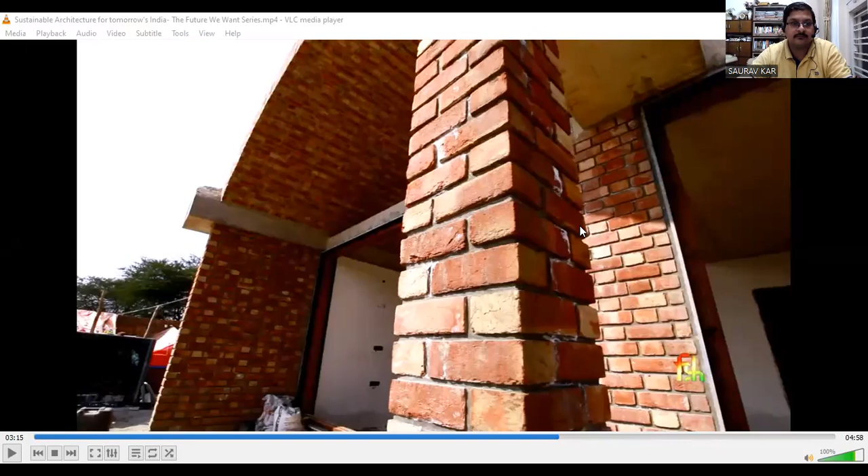We're standing on the west side of the house, and you will notice how there are very few windows. There are only really ventilators that punctuate this elevation. That's because this is in a sense the worst side for creating large windows. It becomes very difficult in the summer. It's not got much heat in the winter either. So this is the place where it's best to reduce the windows.

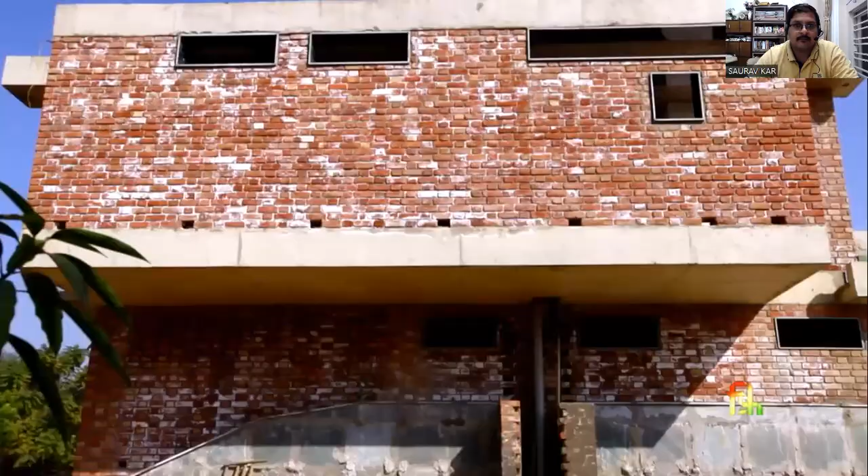Solar panels. Once we've got such a reduced quantity of demand, it's possible to think of meeting that demand using entirely renewable energy sources.

Yes, corporate offices, cultural spaces also. Education institutes, IIMs, IITs, they are going for such technology. So it's sustainable goal number 11, which I discussed in the very first class. 17 sustainable goals, SDG, sustainable development goals.

It's such a fantastic thing that even recently I found that the Heritage School, who organized Saraswati Puja, in their pandal they highlighted the 17 principles of SDG. Those who went to the Saraswati Puja at the Heritage School this year will know that the Sustainable Development Goals are not only popular among college students but also among school students nowadays. So it is such an important issue. So coming to the slides.

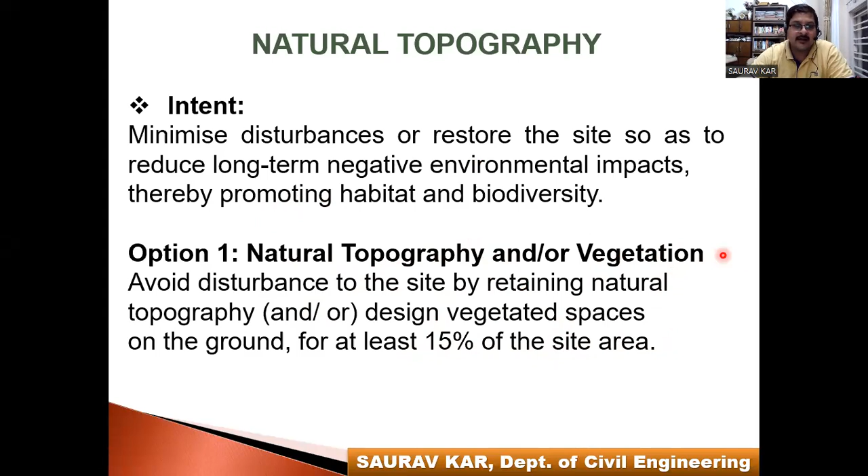Okay, so today I discussed the natural topography, or how much topography should be covering the area. 15% of the site area should have natural topography or vegetation. Natural topography means the natural existing greenery, trees, indigenous species, plants, or vegetation. If you are separately investing money on gardening, etc., then it's very good. So these are the points that I told you.

Next is heat island reduction, non-roof. It is another very interesting thing, that is heat island reduction. What is heat island reduction? In rural areas, we have a lot of shade, where the surface of the site is getting cooler. But in urban areas, we don't have much shaded area. So in a particular city where the greenery is very less, heat island formation is there.

What is a heat island? A particular area of the urban city where an island is formed where the surrounding temperature is getting increased like anything. So heat island formation is a very peculiar and very common problem in urban cities. Okay, and also non-roof. So heat island reduction, non-roof. So what is the main aim or intention behind this issue? Minimize heat island effect so as to reduce negative impact on microclimate.

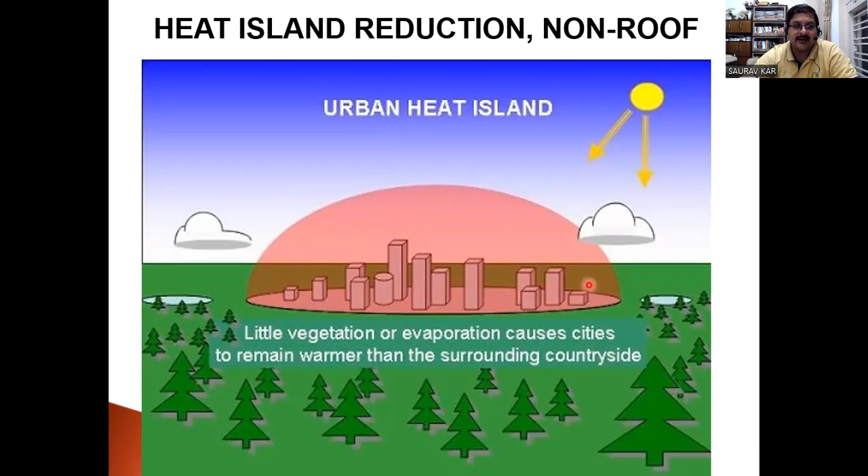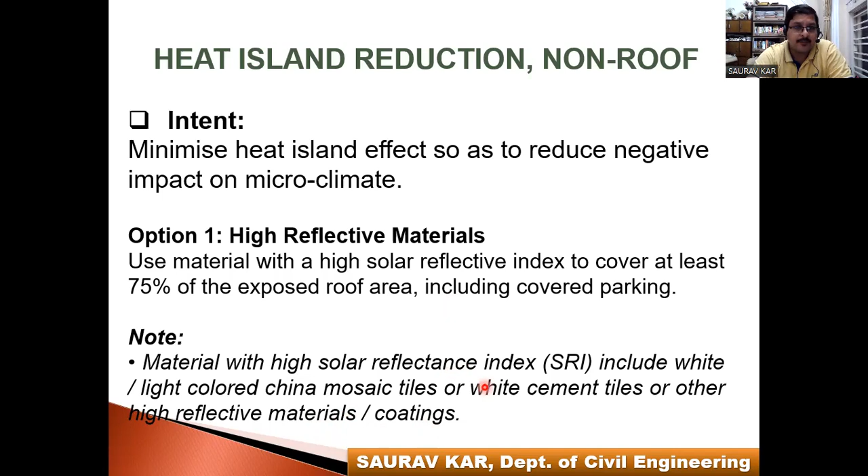Similarly, as a human being or a normal citizen, what can I do? I can give a white coat of paint to my roof, because those who stay on the topmost floor of a flat or residential building feel the maximum heat, since throughout the day the heat of the sun is absorbed. So that can be reduced. Okay. Very interesting, very common sense, very common practical things.

Okay, so we can reduce the heat island like this. Another diagram here, we can see the heat island phenomenon occurring. How? See, from the trees the temperature goes down, heat of vaporization. Heat from the road surface, heat from the vehicles, obviously a big issue. A large number of vehicles are increasing day by day, private vehicles on the road.

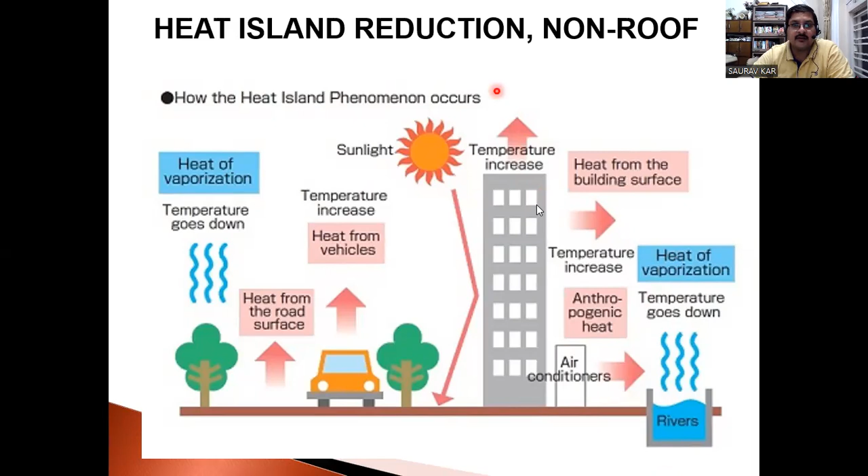So the heat from the vehicles, heat from the machinery, heat which is coming from the auto ACs. So with heat from vehicles, temperature is rising. Temperature increases from buildings also. So these are all the issues, how the heat island phenomenon is occurring.

So, solar reflective index, SRI value for different roof types. If we are using a low slope roof, where slope is less than 2:12, means 1:6 actually, the minimum SRI value is 78. Low slope roofs are particularly flat roofs. For a steep slope roof, more than 2:12, a minimum SRI value of 29 should be adopted.

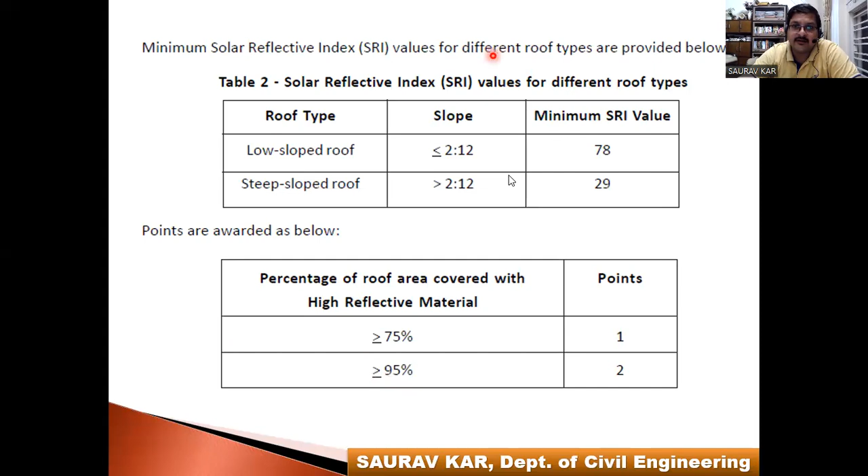Okay. Now coming to the points about it. If we have reflective material covering more than or equal to 75% of roof area, then 1 point. More than or equal to 95%, 2 points. Another very big issue which can help you gain more points: if you cover the majority of your roof with solar panels, that acts two ways. One, it is reflecting the heat, and also it is absorbing the heat from the sun and converting the solar energy into electricity.

Outdoor light pollution reduction. We can also reduce outdoor light pollution. Light pollution is also a very big issue. Many state governments don't understand that unnecessary lighting is also creating havoc. It is not increasing the aesthetic of our city. It is rather destroying the money of the common mass, destroying the natural ecosystem, harming the surrounding environment by light pollution.

Many state governments don't understand this. Unnecessary huge amounts of lights. You know, Trifala lights are there throughout Kolkata. Unnecessary lighting, huge amounts of light, absolutely not required. They are indirectly increasing the surrounding temperature also. People don't understand this. That is the fallacy of educated and uneducated people.

I mean, I'm forcefully implementing huge amounts of, for example, staff lights, street lights, or floodlights in my campus. For example, my campus is around 1200 square meters, and I'm putting up one huge floodlight. It is giving light to the campus, but it's unnecessarily increasing the light pollution also.

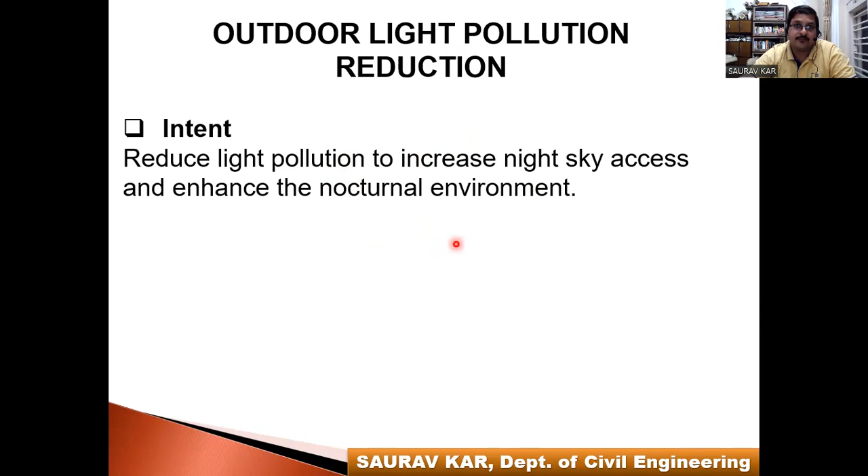See, one case study I've taken from the US Department of Energy, 2011 data. Energy wastage, what light pollution is costing us. US states are very much advanced compared to us. We have an energy conservation building code also, I will discuss this, ECBC. It is from our Indian standard, the energy building code where energy efficiency is addressed. But huge studies like this, they don't do.

So 13% of residential electricity used in the US is for outdoor lighting, creating pollution. Bad outdoor lighting wastes 0.5 kilowatt hour of energy per house per night, enough energy to power a 50-inch plasma TV for 1 hour. So this energy wastage can be saved. Everywhere we should look for saving, not wasting. We should look for it at construction sites also. We should always look for saving.

See, about 15 million tons of CO2 are emitted each year to power residential outdoor lighting in the US. Residential outdoor lighting means lighting in parks, lighting on footpaths like this. About 3 million passenger cars have the same CO2 emission.

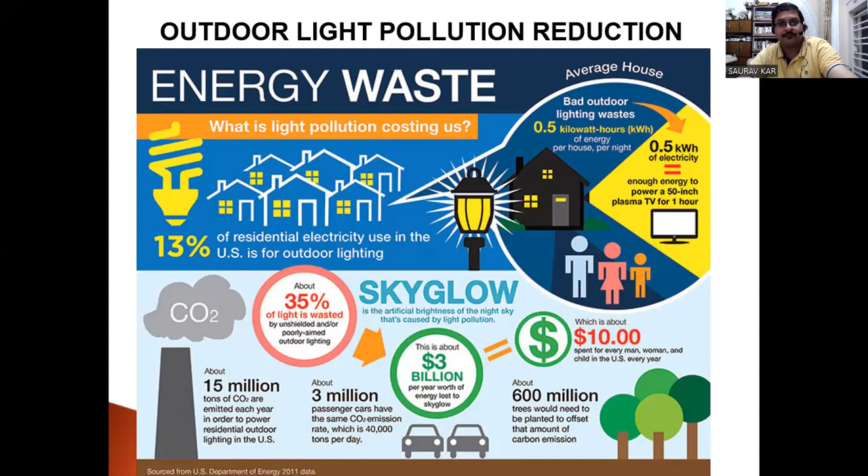So next day I will extend this presentation, but let me show you one video. See, green building, yeah. Let me show you another video, how energy efficiency is implemented.

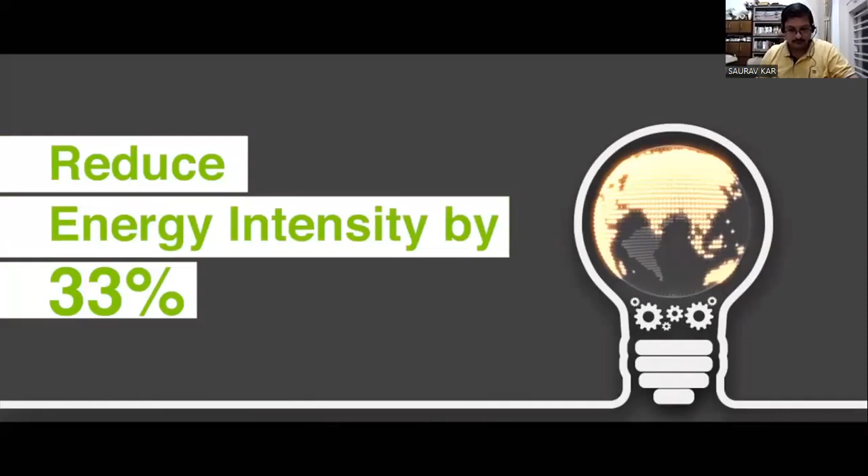Every country needs energy for its development and economy, and the same is true for India. India is a developing country with large ambitions, and energy consumption in India is expected to double by 2030. India's climate change policy document talks about the need for energy efficiency and the role it can play to significantly reduce its energy intensity by up to 33%. Energy sufficiency and energy efficiency are very closely intertwined. At AEEE, we believe that energy efficiency is the cheapest, fastest, and cleanest resource to make this energy transition.

This office was designed using AEEE's lean, mean, and green strategy. At the start of the design process, the AEEE design team made a very conscious and deliberate effort to reduce external heat gain, maximize daylight, and bring in fresh air. I would like to express my sincere and heartfelt thanks to MacArthur Foundation for their generous support which made this office possible.

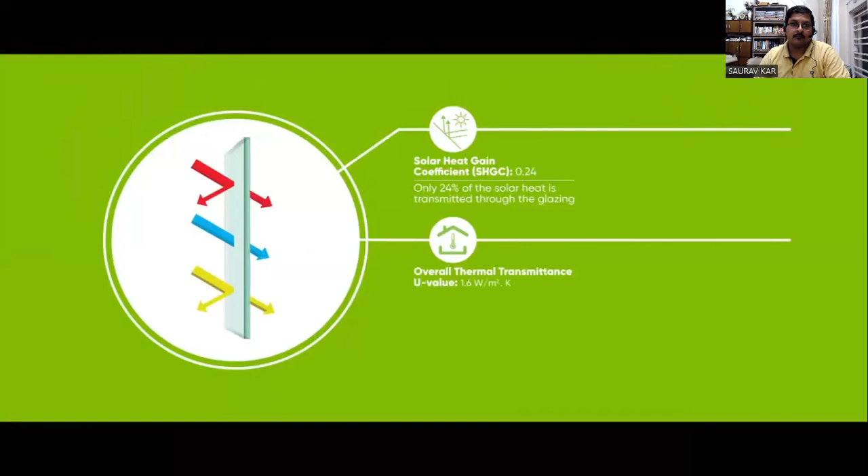Saint-Gobain has played an instrumental role in supplying these double glazings which reduce cooling load inside the office while maximizing the daylight. A carefully selected combination of U value, solar heat gain coefficient, and visible light transmittance helps achieve this design goal inside this office.

Well-being and sustainable development are two important priorities for Signify. In AEEE, we see a platform of like-minded people to take the journey forward in India. It is with great pleasure that we are partnering with AEEE, and there is a reason for that because we share a common vision. We are not only propagating new lighting technology which is going to be much more energy efficient and much better from a well-being standpoint, we are also walking the talk by clearly taking upon ourselves to be carbon neutral by 2020.

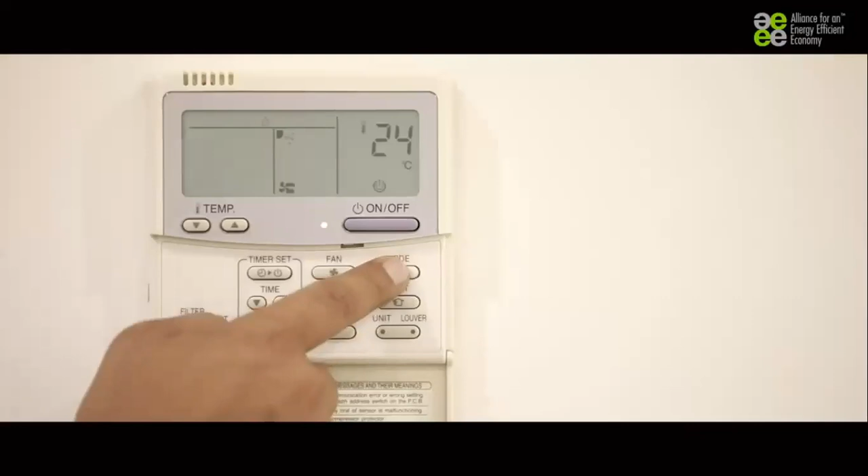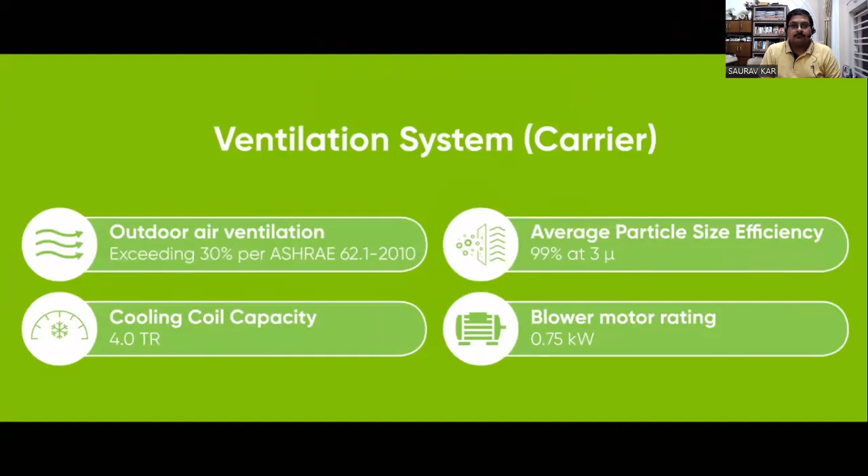What we have done in this office reflects our commitment and our passion to coming up with the right kind of air conditioning solutions. The installed VRF system is among the most energy efficient air conditioning systems available in India right now. The ventilation system has been specifically designed and integrated with the VRF system to address air pollution and Delhi's compromised air quality, ensuring that the particulate matter and CO2 levels inside the office building are within acceptable standards.

To showcase our belief in adaptive thermal comfort, we integrate an active air conditioning system with the deployment of super energy efficient fans provided by Atomberg. They use a technology called brushless DC motor, which allows them to reduce energy consumption by up to 50%.

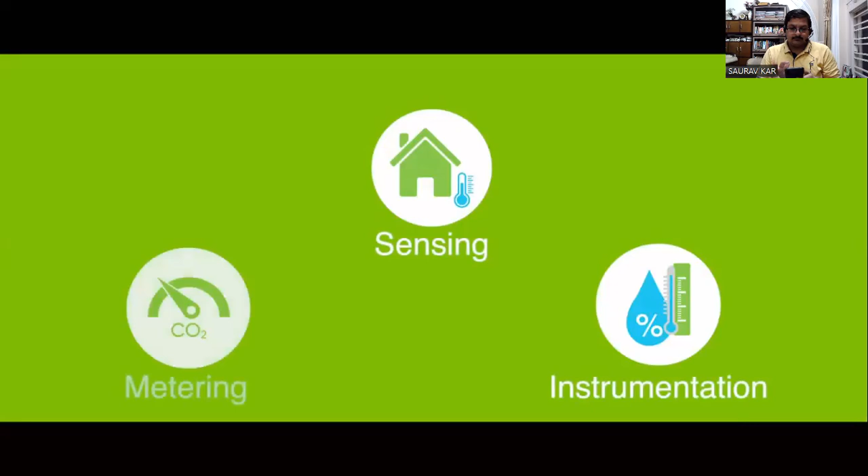We have used technology provided by Siemens and Honeywell to ensure that a well-designed and well-executed energy management strategy starts with proper sensing, instrumentation, and metering technology. This feeds our central controlling unit and keeps our office CO2 and humidity levels both under check and under constant monitoring conditions. An Acti9 SmartLink is the mind of this system.

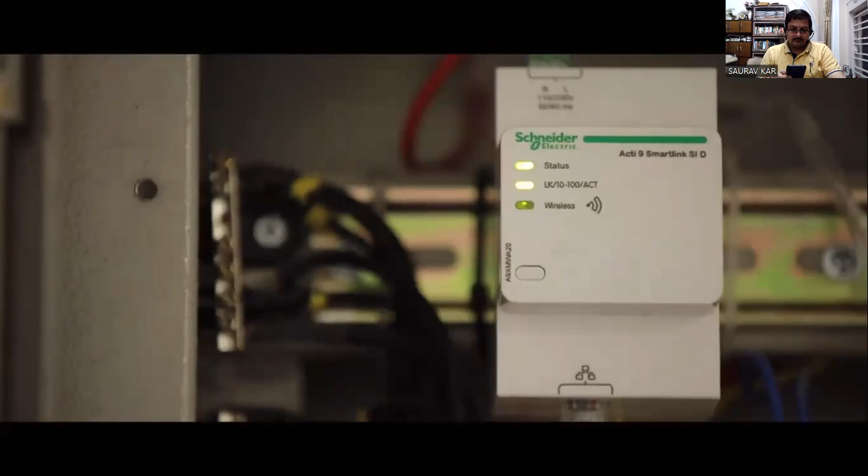The little devices called power tags are the ones aggregating the energy consumption and all the electrical parameters, and through the remote monitoring capabilities of this SmartLink system, they are beaming the information to the building management system. Each of these is separately monitored, and we can track and benchmark the energy consumption at the system level and at the component level.

At Schneider Electric, we believe that energy efficiency is a cost-efficient, cleanest and most abundant source of energy. I'm delighted that we have a partner in AEEE which shares our beliefs and is committed to this cause. I believe with this new office design, AEEE is going to lead by example towards enabling an energy efficient India.

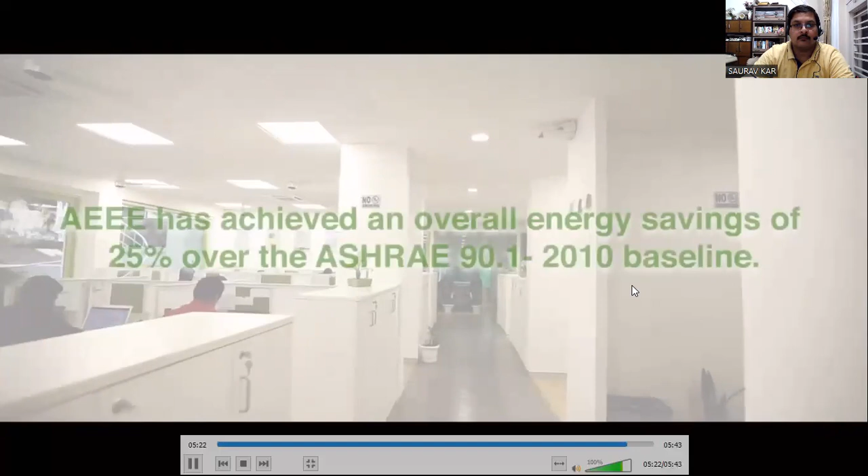So this is how AEEE is a very big council in India. They promote the energy efficiency sector. See, various companies are there, with the entry of big companies. Take Atomberg, for instance - if you know Atomberg, it's a very good company. They provide automated ceiling fans, ACs, and ceiling fans with remote sensors. You see Atomberg in TV ads during summertime. Carrier is also a very big AC company.

Schneider Electric has an office in Sector 5 - those who go through Technopolis from the Ruby area, we have a Schneider Electric office there. Saint-Gobain is another very big glass company. I also have a friend who works at Fenesta, a very big glass company. And Siemens is a very big electrical and electronics company. So they all come forward to bring out this energy efficient system in India.